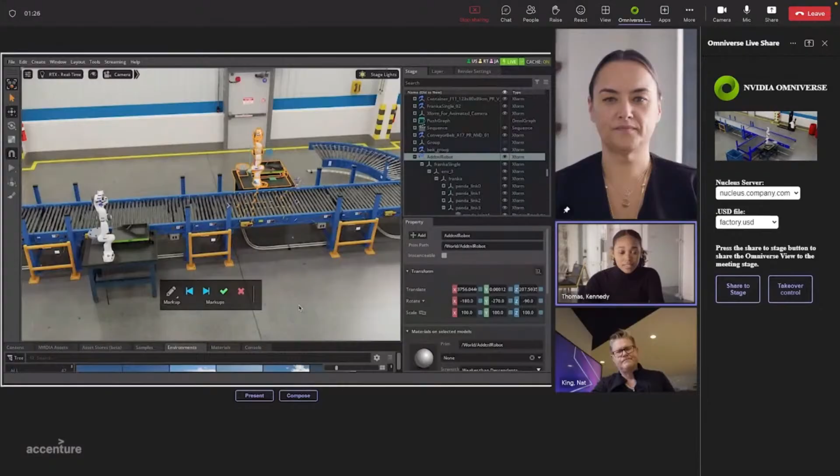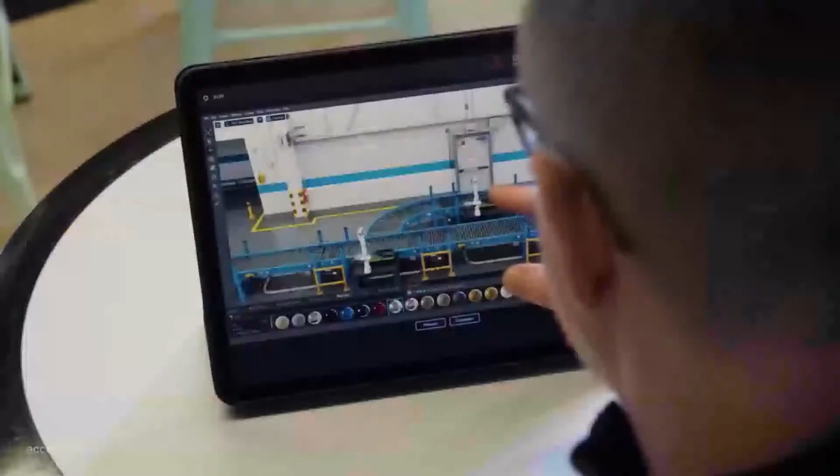Kennedy, let's put the additional station over here. Ooh, I like that. Give me a second. I'll add the rest of the conveyor belt track. So while Kennedy is working here, I can move independently to work with Nat. Nat, are there any structural impacts we need to think about? I've been watching. It looks like that new station may impede our fire escape. I'm going to move that door right over here.

We've gotten a lot done on this call, but we've also got other stakeholders to involve. So I'm going to add a note for our other work streams. And since this is all connected to Teams, in the future, those annotations could become tasks or emails or calendar invites. All right, thanks for your help, Nat and Kennedy. See ya. That was just a quick demonstration of where we are today, but we're excited to continue working with NVIDIA and Microsoft to bring 3D collaboration to everyone.

So hopefully this gives you a good idea of what this application can do, and a lot of clients are interested in implementing this on their on-site facilities as well.

So the next experience I've got is a geospatial experience of Accenture's Helsinki office, a digital twin that we created using 3ds Max and Omniverse USD Composer live workflow. Using this workflow, our 3D artist was able to collaborate with other team members to build a living environment in real time.

We were able to fuse data from multiple sources, including Matterport, and now we're using this as an accelerator to create subsequent indoor experiences, including robotics, fire simulation, people simulation, and sunlight simulation inside of the same digital environment. So let's see a quick demo of this.

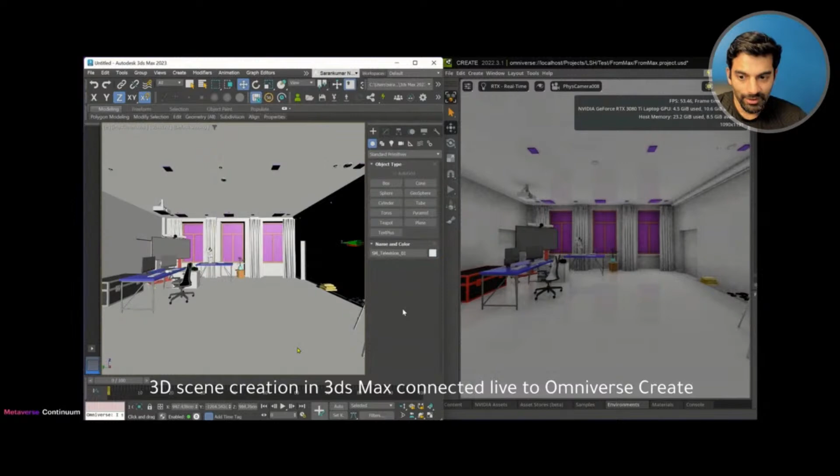As you can see on the left side, we've got our 3D artist creating the layout as well as 3D models in 3ds Max, whereas on the right side, we've got Omniverse connected in live workflow mode.

And now once everything is in Omniverse, we can use photorealistic textures and lighting effects. Once the environment has all been dressed up, we can use a real-time sunlight simulation extension to simulate lighting conditions inside of the office.

And these are some of the photorealistic renders we've taken of the place. And believe me, it looks better than the real world location itself.

So what we've done is that we've integrated this office experience inside of a city geospatial digital twin as well. So after building this office building, we decided to build the entire city.

And what we've done in this case is integrated with Cesium, which is a mapping platform integrated with Google Maps 3D tiles data to create a 3D experience of the entire city.

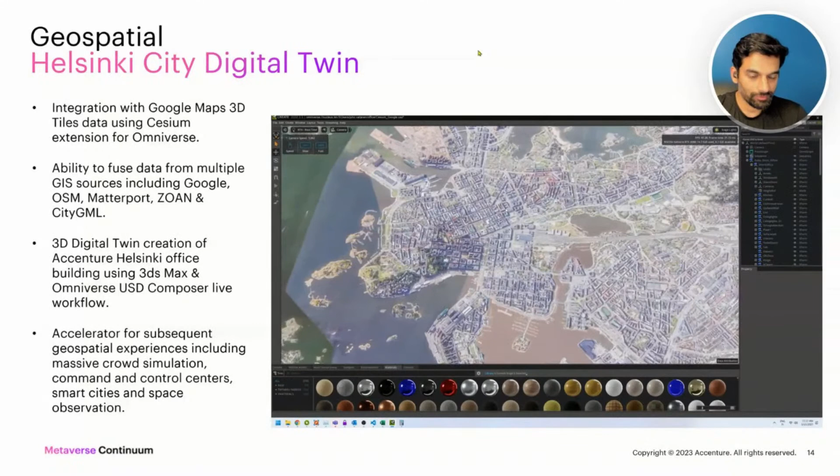And in this particular experience, we are also able to fuse data from multiple geographic information system sources, which include, of course, Google itself. Then we've got OSM, Matterport, ZOAN, as well as CityGML data, all combined in a single experience.

And again, what we've also been able to do is integrate our office environment into the city environment as well in a very seamless way.

And we're also using this city environment as an accelerator for subsequent geospatial experiences, again around different simulation aspects such as massive crowd simulation, command and control centers, smart cities, and space observation.

And now that you can see in this case, we've now gone into the building and we can see the full indoor experience of our office in here as well.

And this gives you the entire control of Omniverse, whereby you can create your own layouts and other experiences inside of this office environment as well.

And now this is showing one of the other rooms, which has some really nice lighting in there. And now we'll go into the kitchen area as well.

And you can see how dynamic the lighting and the photorealistic rendering is there. And now we've just popped out again.

So using Omniverse as a cohesive platform, we're able to build these macro to micro and then micro to macro use cases, all in the domain of geospatial experiences and technologies.

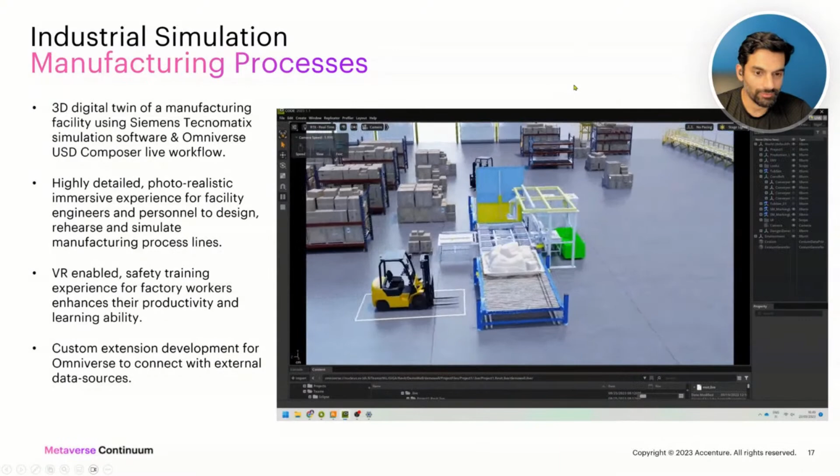So now let's see a few applications of industrial simulation and manufacturing processes inside the Omniverse. In this case, what we've done is built a 3D digital twin of a manufacturing facility, which was built originally using Siemens Tecnomatix software. And what it does is give you the full power of a simulation application integrated with Omniverse.

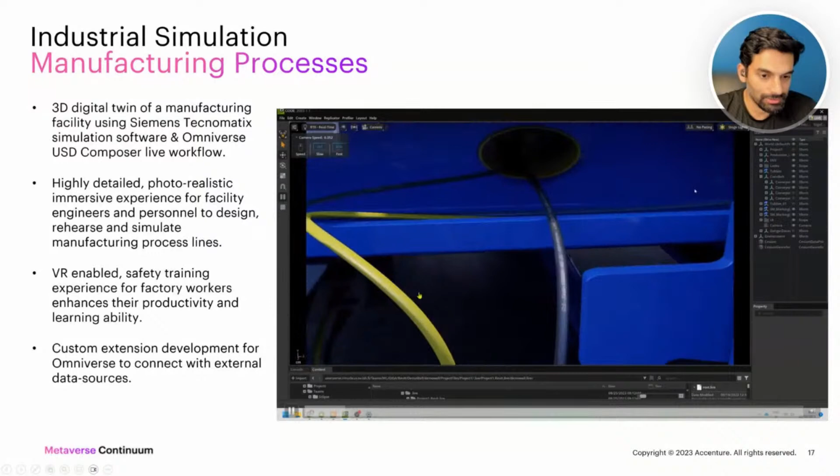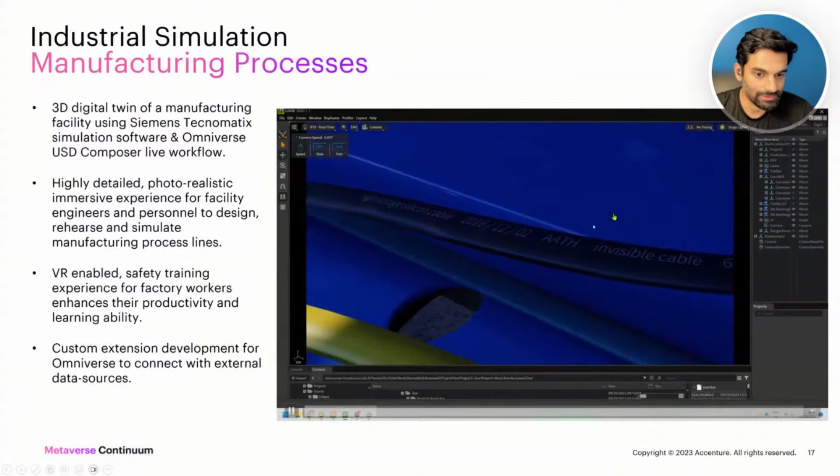In this case, we're showing the simulation and the 3D digital twin environment inside of Omniverse. And this shows you the high quality and level of detail that you can add. As you can see, even the labels on the wiring itself inside of this industry facility.

And as we extend outwards, we can see a full conveyor belt system that was developed inside of Siemens Tecnomatix, simulating side by side, with the left side showing Omniverse and the right side showing the simulation happening in Tecnomatix.

And as you can see, this is all real-time collaboration happening across an external application inside of Omniverse. And in Omniverse, you get the full environment in full photorealism and immersiveness that you would not otherwise get in the source simulation software itself.

So what we've really done in this case is that we've also built a safety training experience and an onboarding experience for new manufacturing workers and industry facility personnel.

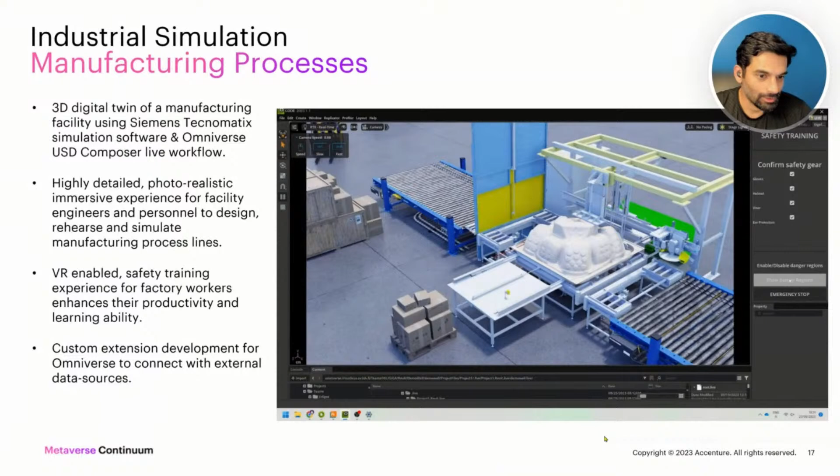So in this case, what they can do is run through the entire process in a way that they can confirm what kind of safety gear they need, and also we can showcase some of the danger regions which they do not need to be around.

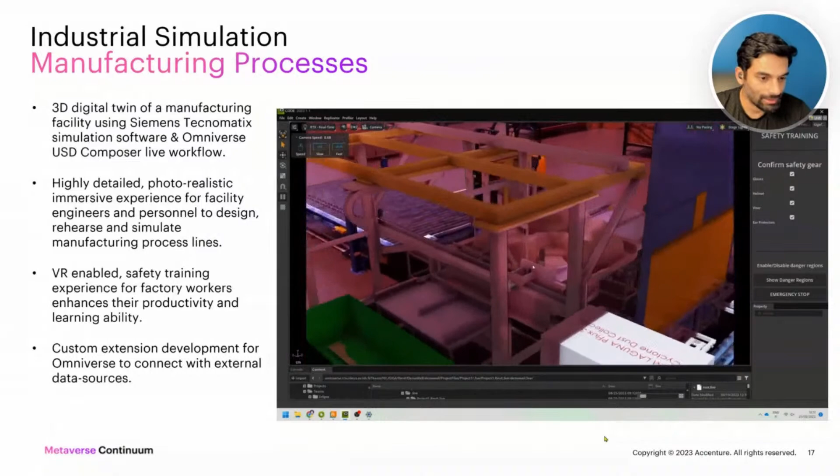And again, they can see all of this in VR and experience the entire environment in virtual reality in a way that they can get trained and upskilled in a very intuitive fashion.

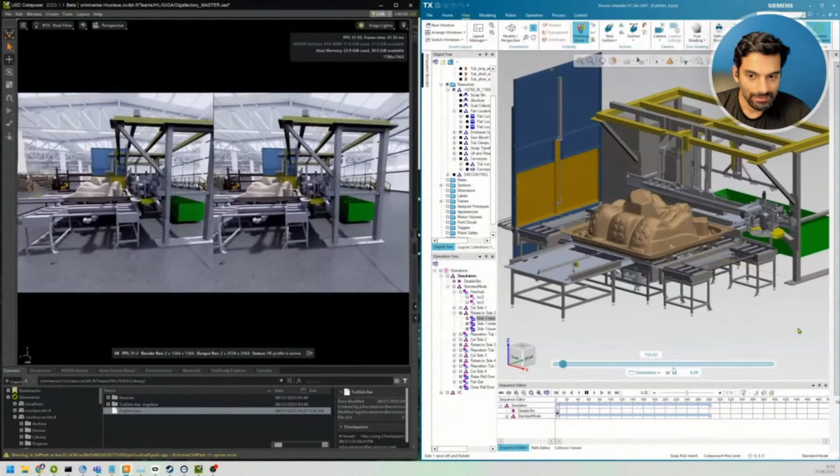So in the next video, I can show you how this same environment would appear in a VR mode as well. On the right side, again, we've got Tecnomatix, where on the left side we've got Omniverse connected to a Varjo XR-3 headset. And using that headset, the user can also interact with the environment, not just observe it.

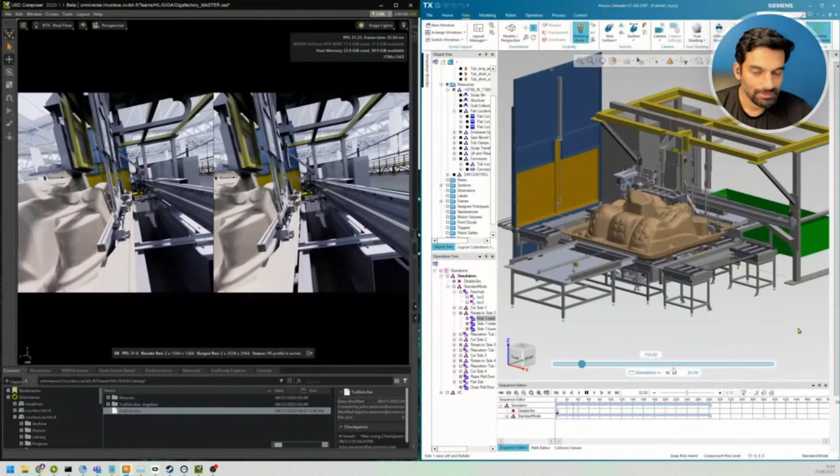This showcases the immersiveness of the platform as well, whereby in a traditional software, you'd just be able to run the simulation, but using Omniverse, you can actually experience it firsthand. And this gives and promotes the intuitiveness, and the learning capability is also enhanced in this case.

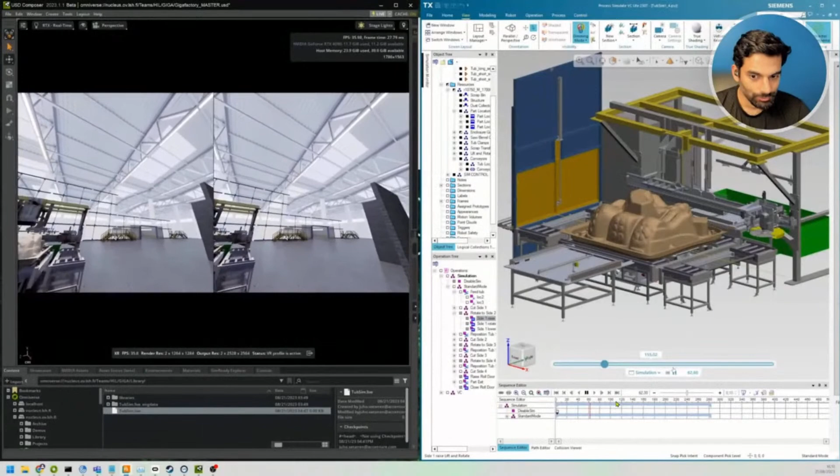So using the controllers, you can also interact with the environment in this case, and you can also rehearse or perform again these kinds of behaviors where you perhaps could not perform in the real world environment. So this simulation gives you a safe environment where you can rehearse and pre-detect failures or other actions that you would otherwise not perform inside the real world environment.

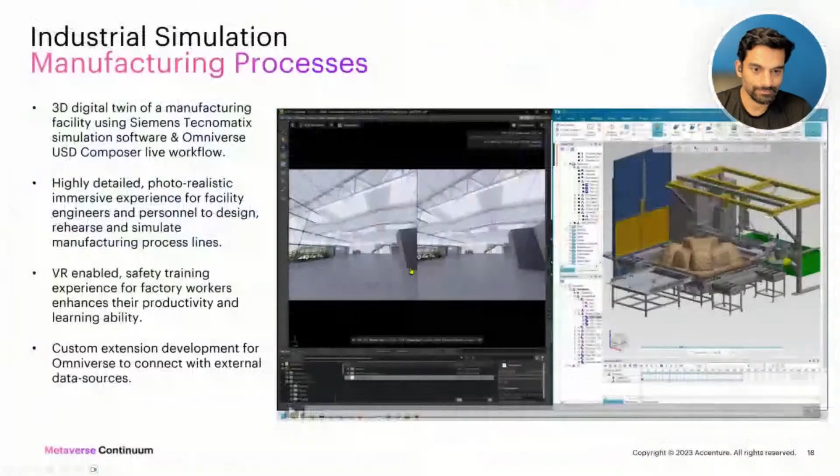So this next experience we built is all around autonomous mobile robots, using Omniverse Isaac Sim-based physics simulation capabilities to optimize the pathfinding capabilities of these autonomous mobile robots. This is a very applicable use case in an industrial facility or a warehouse environment.

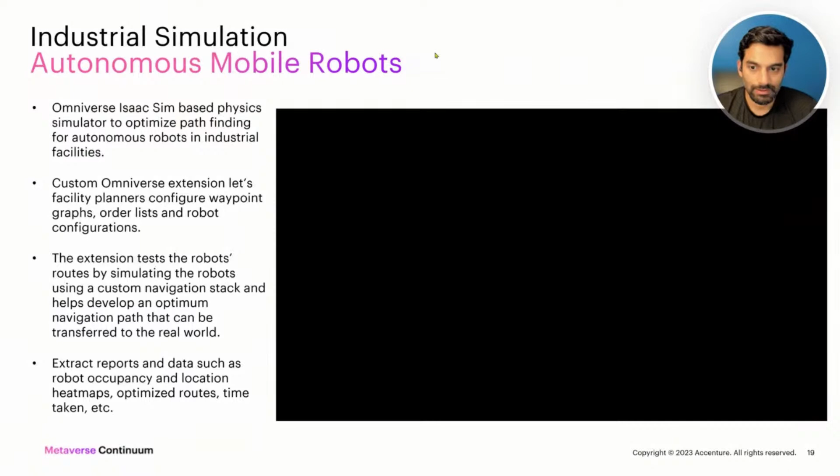What we've done in this case is build a custom Omniverse extension whereby you can configure the different variations that you will need in that environment. You can configure the nav graph, add some parameters on your robots, and figure out the best possible pathways that the robots will then need to follow in order to fulfill those commands. So using a simple extension, you can control and configure this entire simulation experience inside of Omniverse.

The first thing you can do is import any environment that you want, and it could be your real world replica digital twin as well, in this case, just so that you can run the simulation in your real world as well as a rehearsal to what would be happening in the real world actually.

So in this case, what the operator is doing is actually adding some waypoint markers in order to create the navigation graph for the robot in the first place. This is then connected with a line so you can create a full nav graph and a pathway where the robot understands it can move.

And then using the configuration options, you can create order lists. So consider these that at each waypoint, the robot either needs to pick up some order or some objects, or it needs to drop some objects. You can also configure parameters such as weight of those objects, just so that the robot can then simulate the entire operation in a very cohesive way.

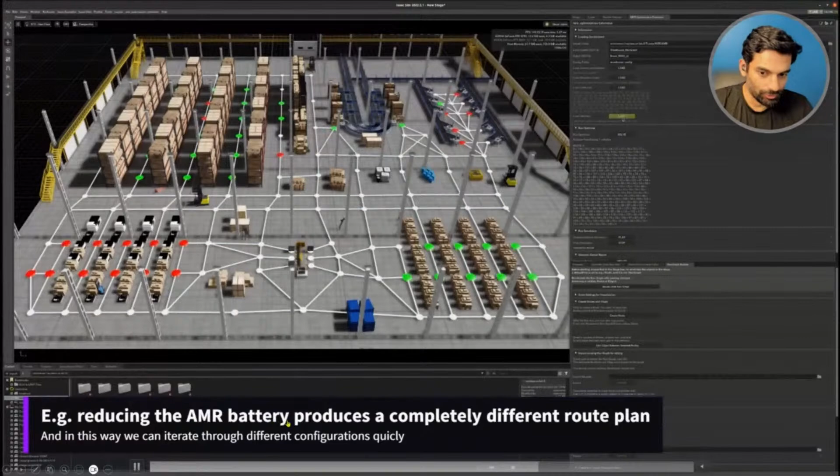In this case, we're reducing the battery capacity of a robot and then understanding what would be the alternate route plan, which will now be configured inside of this environment for that robot.

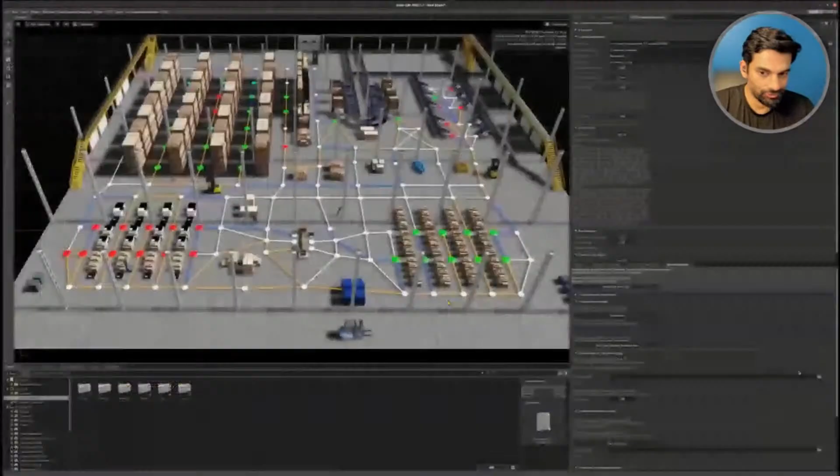And now we can very easily go through different configurations. So we can add more robots, we can add more capacity to those robots, we can increase the capacity of the warehouse environment, and we can run through a lot of other configurations in a way that you could not do in the real world environment. These would not be feasible in the first place to do so. And now you can do that very easily in this simulation capability that we built inside of Omniverse.

And finally, what it also gives you is this very nice reporting capability. So you can take this away and understand what are some of the major occupancy areas that robot would have, and what is the kind of heat map in terms of the navigation that robot is making across the entire floor plan.

And as the final part of this video, we're also showcasing that it's really easy to change the environment of the entire experience as well. And in this case, we've integrated this into a hospital environment and not a warehouse one. And of course, you can configure it in a way that it fulfills the requirement of that particular experience that you want that robot to simulate into.

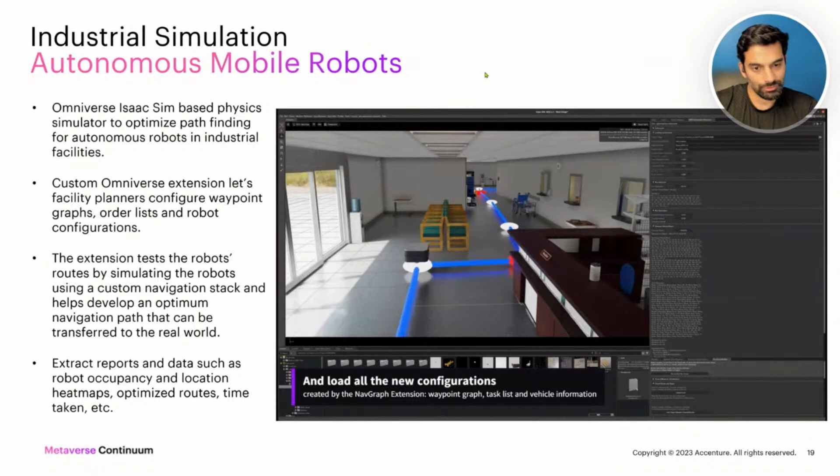So again, this is all very cohesively managed inside of the Omniverse platform, all because it can nicely simulate a lot of behaviors as well as connect with external frameworks such as ROS2 in this case. And then we can actually rehearse robots in a very cost effective way and simulate all of the scenarios which you otherwise could not do inside of a real world.

So we also explored particle simulation inside of Omniverse. And in this case, we've implemented a liquid spillage simulation. So what this does is it exhibits liquid behavior as well as conveyor belt movement and gravity simulation in a single experience.

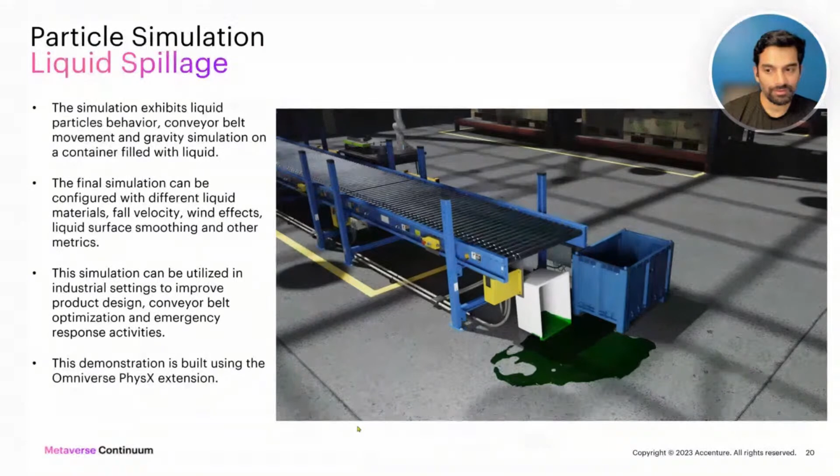So users can use this experience to simulate the industrial process of having a conveyor belt constantly move one object from one place to the other, and then also understand how a liquid would behave while it's falling, as it can also be configured with different materials, velocity, wind effects, and liquid surface smoothing.

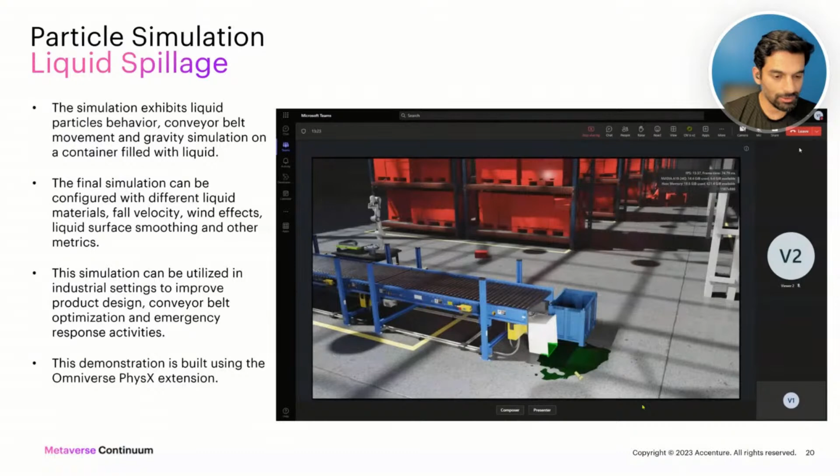We're now seeing the same liquid being simulated across in a different camera angle. These kinds of simulations can be utilized in industrial settings to improve overall product design, conveyor belt optimization, and layout optimization of the facility, and also to understand emergency response activities, like if a liquid would spill inside a container, how far would it go, and what kind of cleaning activity would need to be performed. This is all done using the native functionality of Omniverse.

Omniverse doesn't just let you simulate liquid material, but also other particles like fire. In this case, we're simulating the spread of fire inside an interior environment. Such a simulation can be combined with human behavior elements to rehearse fire and safety drills inside an environment.

In this case, we are running a fire in the bottom of a ferry ship, observing how the smoke and fire particles would move towards the other floor and outside the ship. This helps design the overall architecture of the vehicle in a way that promotes safety measures and follows safety practices and procedures, and you can also design your ventilation and other emergency exits and events around that.

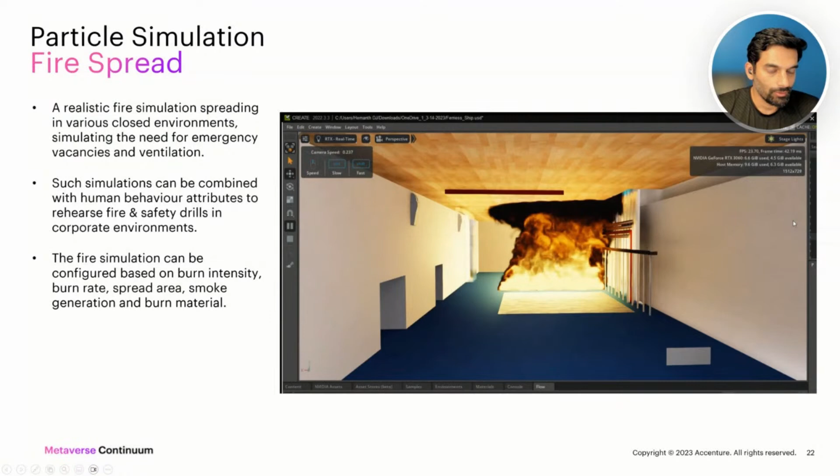So now we've done the same inside our Helsinki office space as well. As we started to build that office space, we've started using it as an accelerator to explore other aspects of Omniverse. In this case, we've done some simulation of fire on top of a sofa furniture. You can see how the sofa would be burning, and as you bring it closer to the other furniture item, the bigger sofa, you can see how the fire now catches on from one sofa to the other.

As the fire spreads across from the sofa, you can configure it in a way that provides parameters for the burn intensity, the burn rate, the spread area, smoke generation, and other such configurations that apply to that particular material or object.

You can also simulate the same in different lighting conditions. All of this is done in a live collaborative workflow, whereby multiple people can come together and simulate the environment from different positions and with different parameters in the same way.